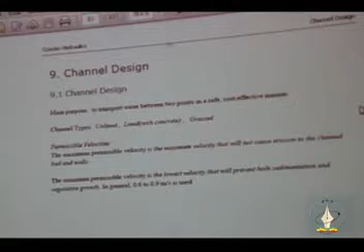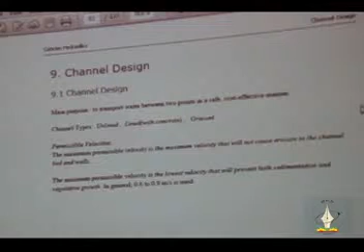...lined or unlined. Lined means you use some type of material to cover the bed and banks, like concrete, some type of geotextile, or simply stone—whatever you think you need. That is some type of lining. When you are not lining it, then it is the natural material that forms the bed and the sides, or the walls, of the canal.

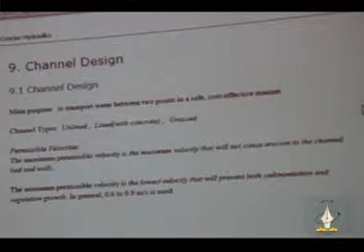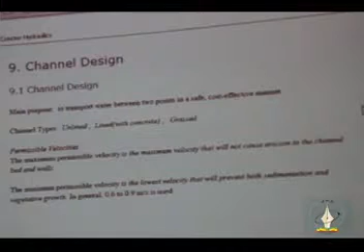So when you design the canal, on one hand this is an economical thing to do, and from a technical point of view, you have to design it properly. That means the most important thing in canals is the velocity. Your velocity should not be a velocity that scours the bed and banks if this is not a lined canal.

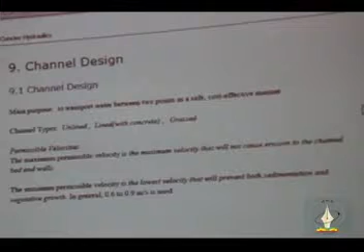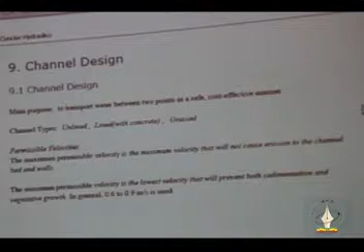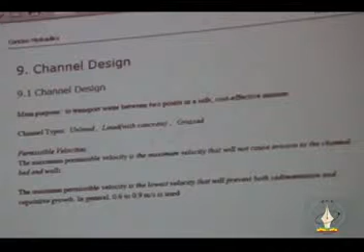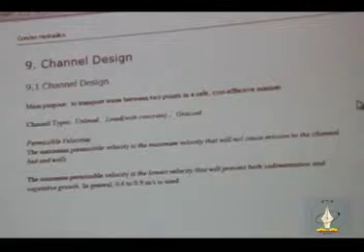In these notes, we are going to simply see the problem from a hydraulics point of view, and then I will give you other notes on how to design other types of canals or channels. But let me also mention that from a hydraulics point of view, when you want to know whether the canal is scouring, eroding, or not, there are a number of different theories.

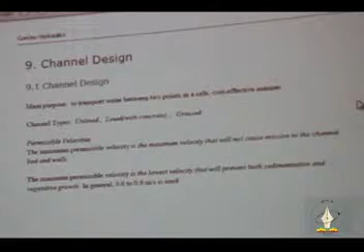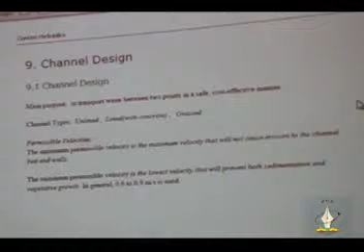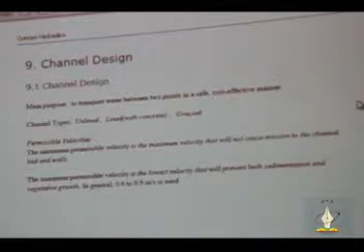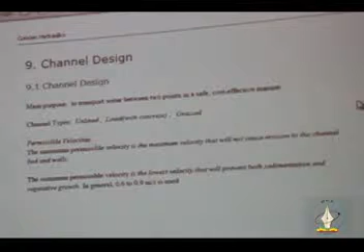For example, in one case you might just use the velocity as a parameter to control sedimentation and scouring. This method is more empirical—based on experiments and field tests—which means it may not always give you a good result, especially if you don't have good geotechnical information about the type of earth and material you are going to build the canal from.

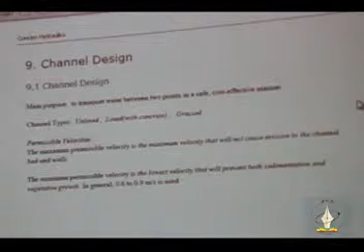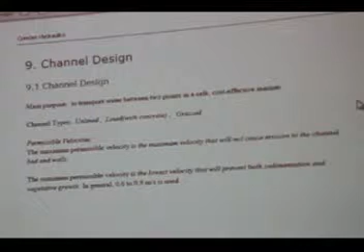But there is another method called tractive force, which means that when water is flowing in the canal, at the bottom and the two sides, the water itself creates a shear stress on those beds and banks.

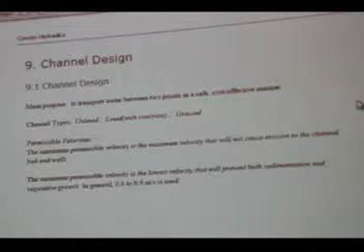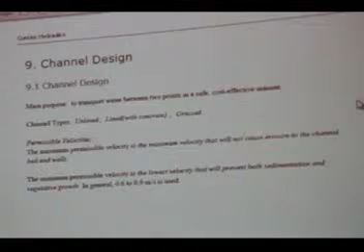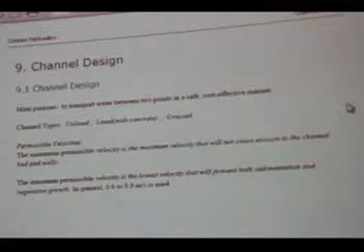If you calculate the shear stress from your canal cross section and the depth of flow, then for certain materials—whether you want to line the canal or not—there is information about the permissible shear stress. If the flow and cross section you selected do not cause a tractive force bigger than the resisting shear stress, then the canal you are designing should be okay.

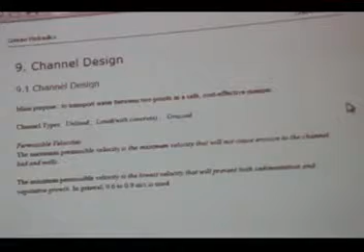If the water is causing a shear stress greater than the shear resistance from the material in the bed and banks, then the water will scour that. We will later see some examples of what we are going to do here with these things.

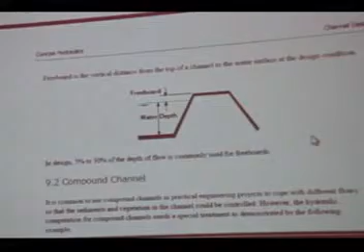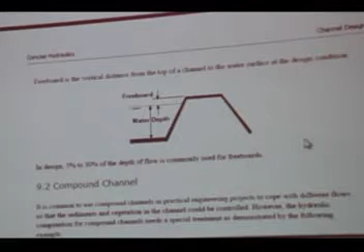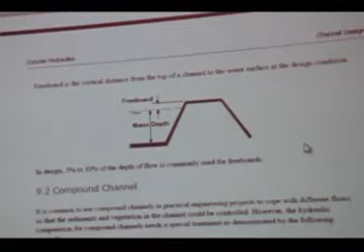First of all, when you design a canal, whatever the flow depth, the water depth that you will have in the canal - that is simply because sometimes there may be a wave in this canal, especially if you are dealing with hydropower canals. Remember that we talked about surge tank and the waves in the surge tank and in the tunnel and so on. In this case, if this is like a canal, the water is going to...

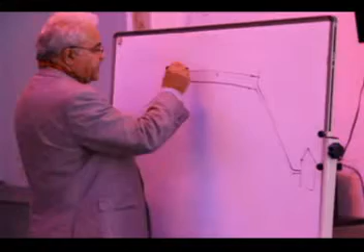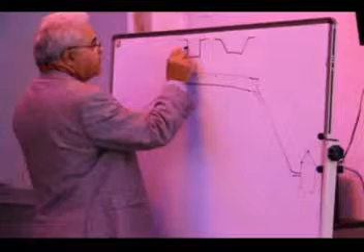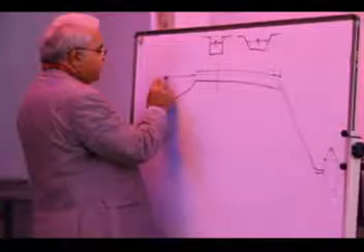Now in this case, if I draw a cross section, it could be anything like this, or it could be like this, some sort of open channel type. And then the water level in the reservoir may be at that level.

Now if there is an instantaneous opening or closing in the turbine, we don't have a surge tank, but you may get some waves here. So if you don't put a good freeboard for this, the water will overflow from these banks.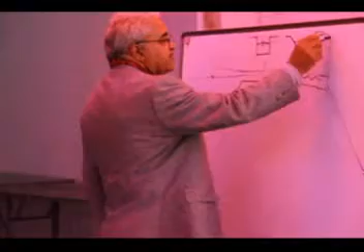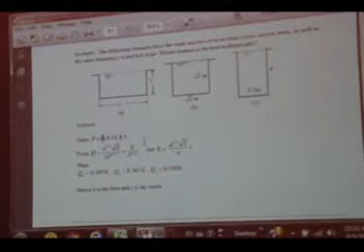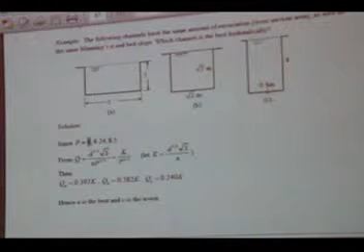So you need to get something like 4.24. I have a feeling that this is a mistake - it might be 2 square 2, but anyhow. And in this other one, it is deeper, only 0.5 meter wide and 4 meter depth.

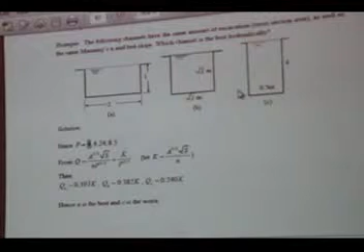Now this cross section and all these other cross sections are almost equal, or actually equal, so in terms of excavation, the amount or the volume of material that you are excavating is the same. But in actual reality, the amount of money you are going to need for equipment to dig 4 meters deep, while this other one is only 1 meter deep - cost-wise, I don't think the excavation is the same, but the volume of material that you excavate is the same.

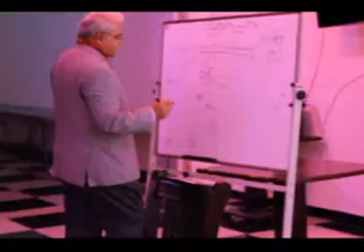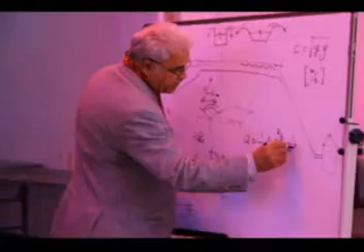Now, here there is one important parameter, K, which is called conveyance factor. What is that conveyance factor? If you change the Manning's equation to this form - if you remember the other day I mentioned that if you change the Manning's coefficient equation from this form - this is like the general form that everyone normally uses, but here instead of R, they have used A over P.

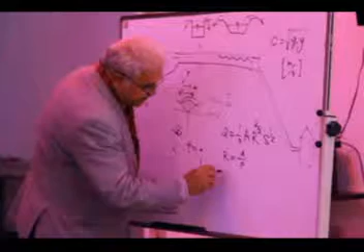So if you solve this, if you replace R with A over P, then you get the equation that is on the board there. And then what they do, they call this A to the power of 5 over 3, times square root of S, divided by N, they call this K, the conveyance factor.

And if you see, for this particular case, which is an explanation of how you design a best hydraulic section, A is not changing. For the 3 cases, if you divide by 4, you get a bigger Q, because the conveyance is the same for all of them. If you divide it by 4.24, it becomes smaller. If you divide it by 8.5, then the flow will become smaller - which means that for the same amount of work, if you select this cross section, you convey more water. If you select that cross section, you convey less water.

So even from an economics point of view, if you think about it, you will say this first cross section looks more economical, doesn't it? Because with the same excavation - although the cost of excavation will not be exactly the same, but assuming if they are the same - then for case A, for that cross section, you can convey more water. Simply because the conveyance factor is the same, but the wetted perimeter is different. So the smallest or smaller wetted perimeter can convey more water.

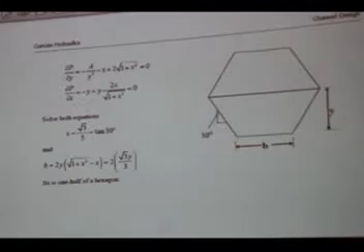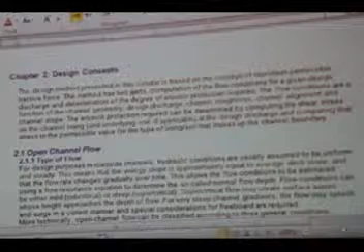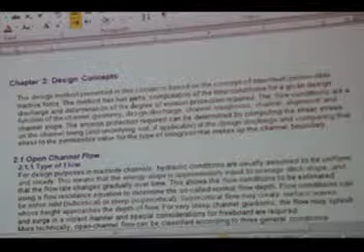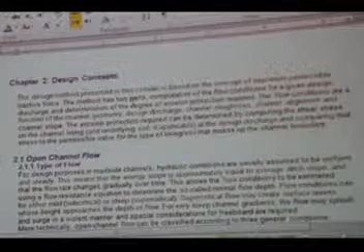We did not discuss that type of canals just before, because I will come to that a little bit later, but I want to discuss this concept, which is really a better one, more scientific, and a better way of designing. Even you can design lined channels or unlined channels, but this is like a more scientific way to deal with this. You can read these, whatever the description is.

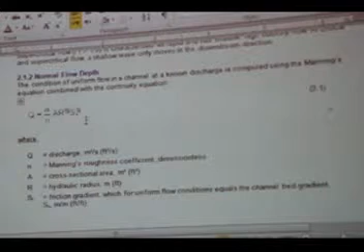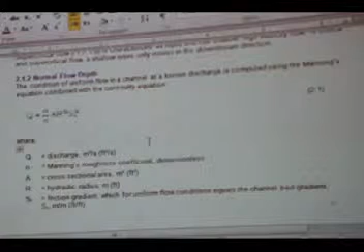Now this is nothing but the same Manning's equation. This alpha is nothing but a conversion factor that if we use the SI unit, this alpha is equal to 1, like I wrote 1 over n and so on. This was for an SI unit.

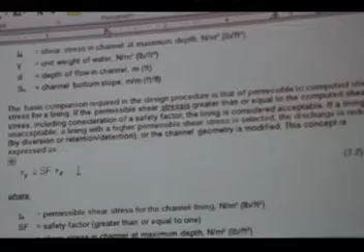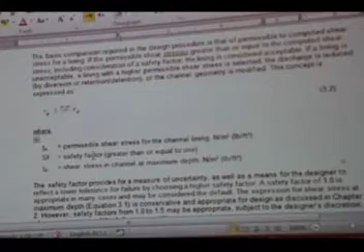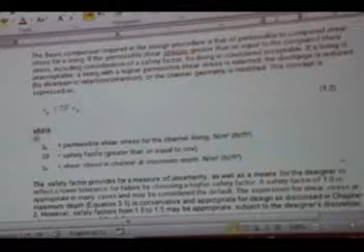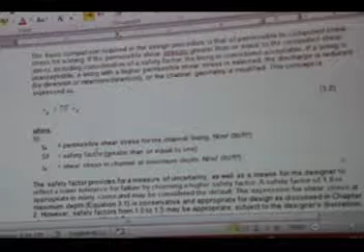But if you calculate the shear stress, whatever that number is, then you may say, I multiply this by 1.5. Why? Because you think that probably something happened, that there will be a bigger shear stress due to the flow on the wall and bed of the canal. And therefore, that means that if you have, let's say, like we talked about 2 Newton per square meter, if that is what you get from calculation, whatever safety factor you use, let's say 1.5, you multiply that by 1.5. So 2 becomes 3, right? Now you select a material that can stand 3 Newton per square meter or something bigger. So this is what it means by safety factor in this case.

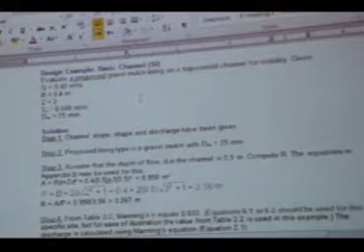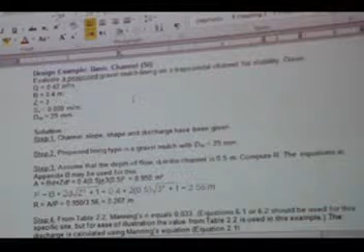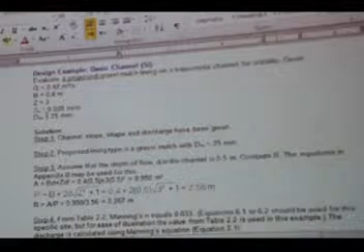They say evaluate a proposed gravel mulch lining on a trapezoidal channel for stability. So what is given? The flow is 0.42 cubic meter per second. The bottom of this canal is 0.4 meters. Z, one of the parameters of the slope, at the side is 3. And the bed slope of the channel is 0.008 meter per meter. And they also give us D50, one of the geotechnical size information, as D50 to be 25 millimeters.

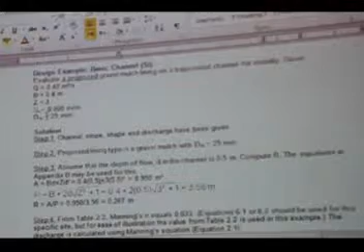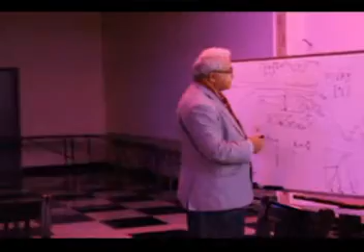Again, this is a good point that you mentioned, because when you do these sedimentation tanks, besides those things that I mentioned, specific gravity is also important. So a specific gravity, if it is sand, it's about 2.65. If it is something like clay or something, it is less than that. But if you are talking about wood or those things, for those things, if they have big sizes, they shouldn't be able to go, because besides this, there also may be a rack here.

A screen of this type of sizes, that you need to include in your hydraulic calculation to see how much energy is lost as a local loss through this rack. We will talk about that also one day to see how we can calculate it.

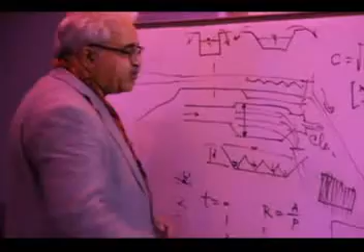Because those big objects, like a big piece of wood, should not be able to go through this section. But on the other hand, if there are small pieces of wood going through, because the specific gravity of that is much smaller than sand and other things, it should not really make a big problem. But bigger sizes should not go through. So when you add this also somewhere in the system, that everything needs to go through, that means that in the system you have another element that you need to calculate the local loss for.

Because if you don't calculate, then water passes through that. At the penstock, at the turbines, the amount of head that we are expecting is not really that much. It may be a little bit, but still, you know, these little by little add together and they make the final head loss, and then you have to subtract that from the gross head in order to get the net head, which produces electricity.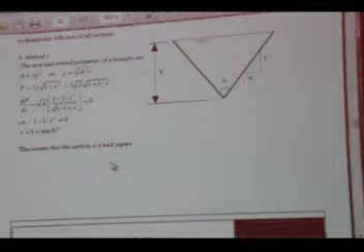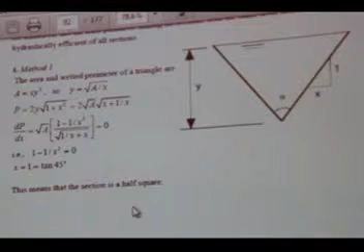If you do this example as an exercise, it doesn't really matter what type of section you are using. I just wanted to show the methodology. So this could be a triangle section, or this could also be part of a trapezoidal section. So if you just go through those equations and calculate them, and then we'll go down to see what else is there, then you will see how to do these things.

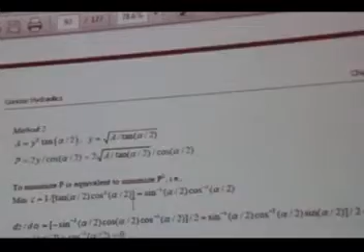So you can get a piece of paper and a pen and work this simple case.